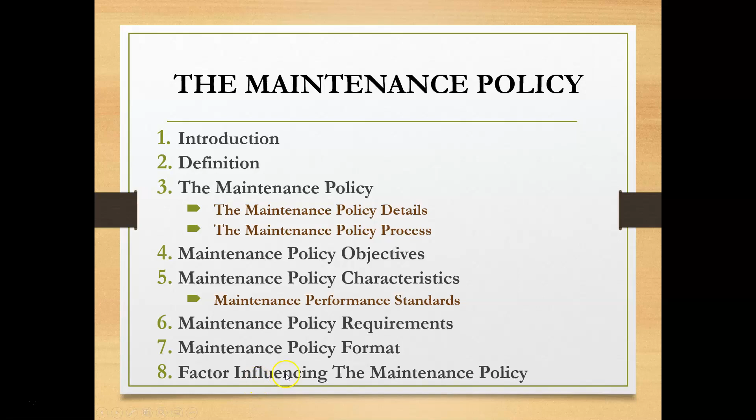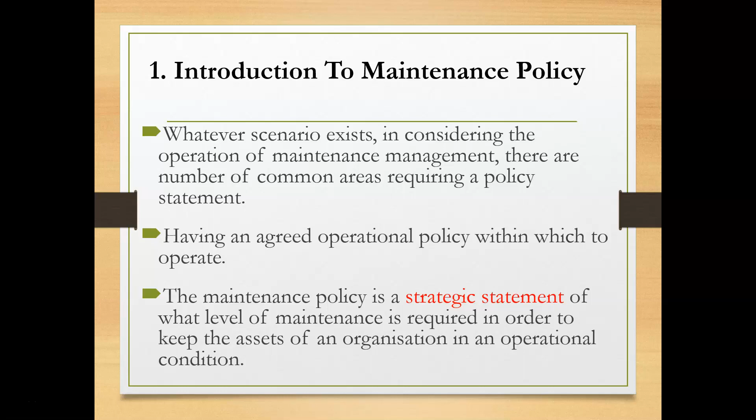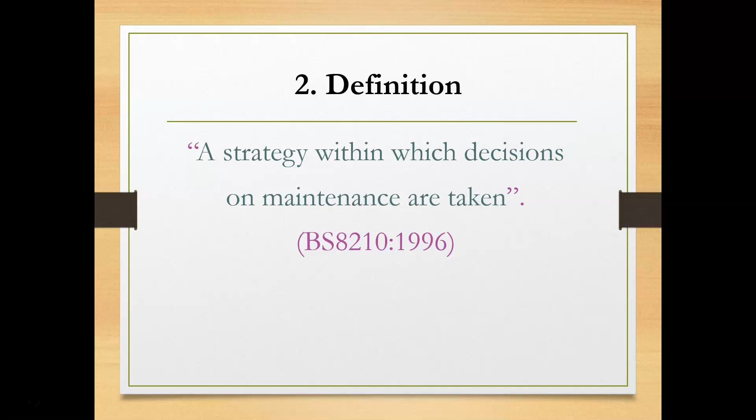Okay, so basically, maintenance policy is a strategic statement of an organization to show their requirement and their objective towards the maintenance policy and procedure, especially in operation condition. So this is the definition of maintenance policy: a strategy within which decisions on maintenance are taken. So basically maintenance policy will be like a guideline for an organization to organize their building, their assets.

So maintenance policy will depend on the size of asset, the nature of the organization's business, and the environment where the organization works in. So nature is basically what types of organization business, for example, if it involves public or a private organization. For example, public like a hospital, an organization or institutions, and also public parks. So it depends on the types of organization business.

And also the environment where the organization works in. For example, if the business involves high or sensitive information, for example in government offices, you have a lot of high security information. And if it is in a hospital, you have to think about the hygiene and safety for the area, and also for the people as well. So it depends on the environments the organization is dealing with.

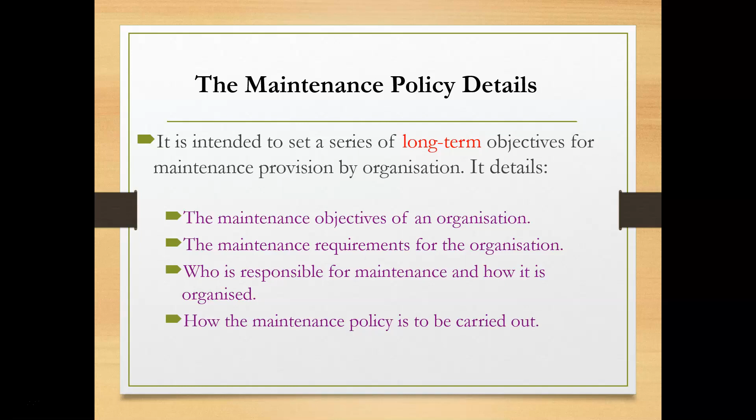Okay, so basically maintenance policy is for the long term, and portrays the organization's objective and requirement, and also who is the person in charge, responsible for the maintenance, how it goes, and what are the procedures and processes. So the process is to produce the strategic maintenance. So it is more on the strategic maintenance or planned maintenance.

And also you have to draw some policy for unplanned maintenance, for example, the limitations of what your organization could achieve. This is why you need to have a policy, so the user or customer will know your capability in managing any unplanned situations. It is very important for an organization to have a policy, because it may involve the time scale, the budget, and resources. So that's why you have to clearly state your capability in the policy content.

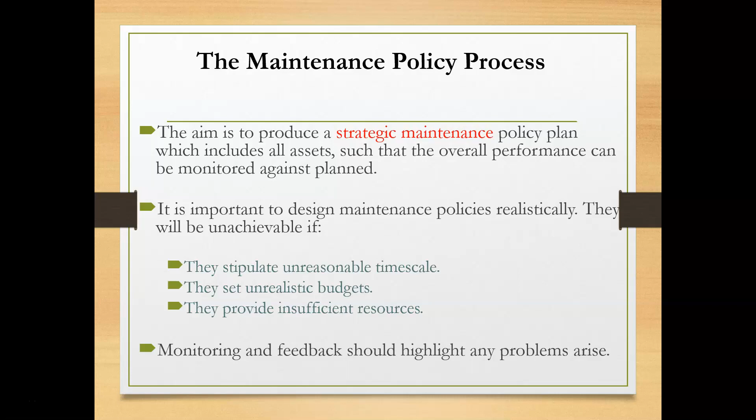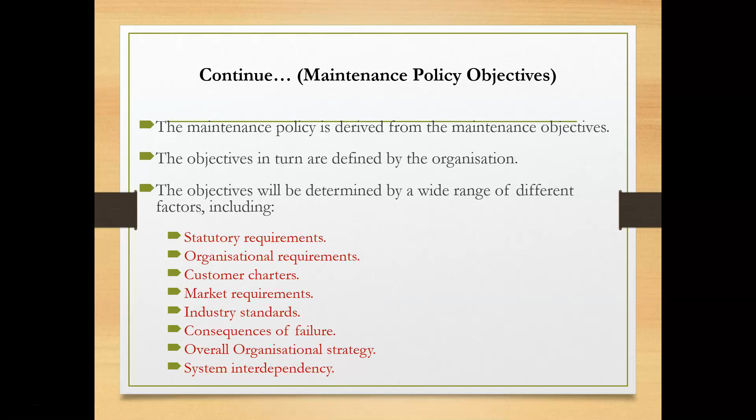And this is the objective of maintenance policy. So it contributes to the overall organization's objective, and what are the penalties for not carrying out the maintenance program, and what resources are needed to run the maintenance work. The objective is determined by the following factors: statutory requirement, organization requirement, customer charters, market requirement, industry standard, consequences of failure. So overall, this may not be the same for each building. It depends again on the nature of the business of the organization itself.

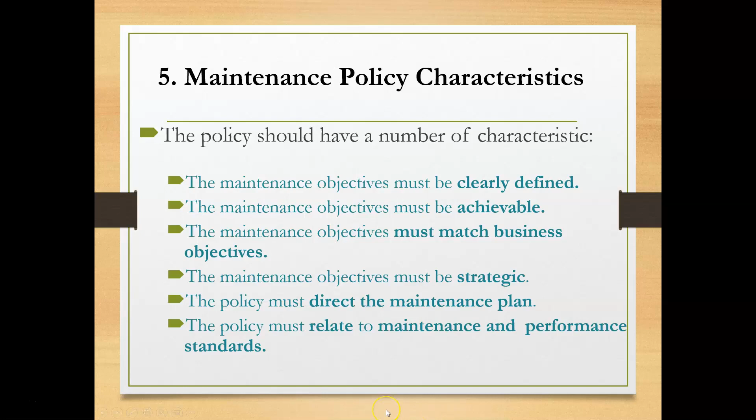Okay, so characteristics. This is very important. Any building should have the same characteristics, which must be clearly defined, achievable, and match with the business objective, meaning it is parallel with the company aims and objectives. And the maintenance objective must be strategic, directed to the maintenance plan, and relate to maintenance and performance standards if required. So overall, the maintenance policy must be strategic.

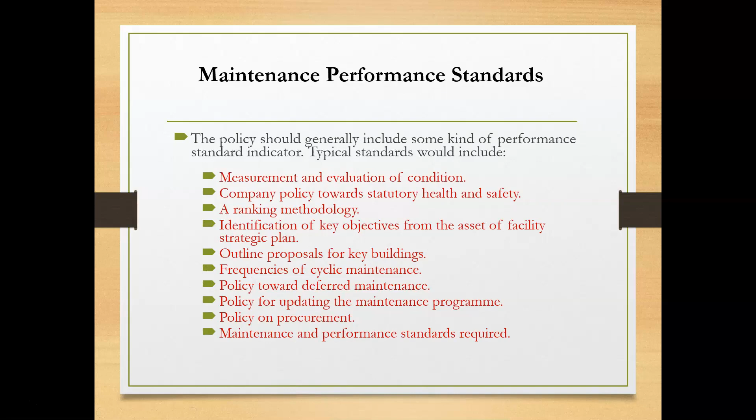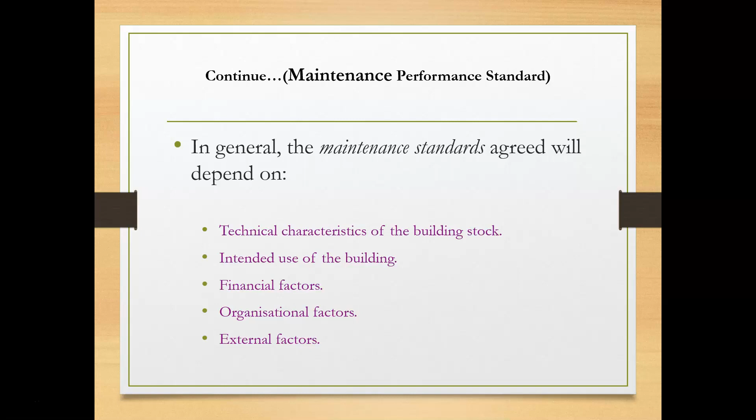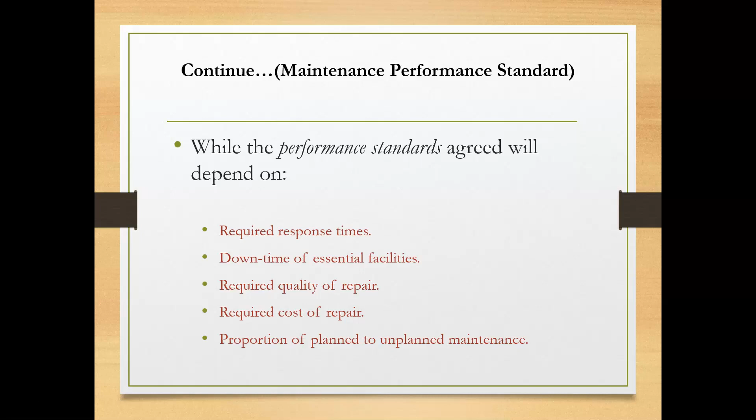Okay, so these are the maintenance performance standards. It depends on what types of building are involved. So the maintenance standard depends on the technical characteristics of the building stock, the intended use for the building, the financial, so that's why you need a maintenance policy to show your financial capability, the organization, who are the persons in charge within the organization, and external factors, especially when you have a third party in charge, for example, of your mechanical and electrical systems. The performance standard depends on your capability and your resources. So these are the guidelines that you should have in your policy as well.

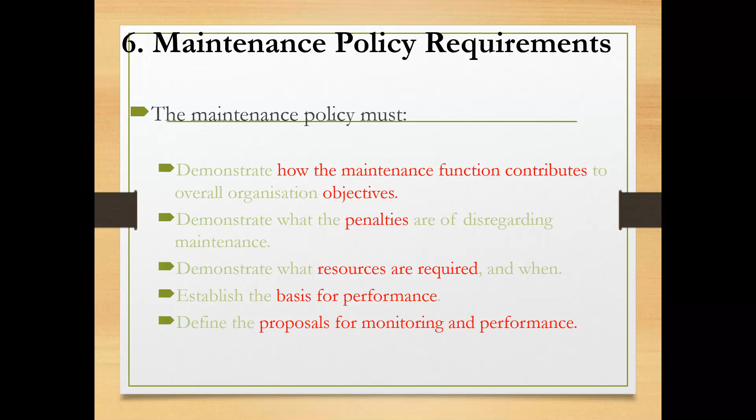Okay, so these are the maintenance policy requirements: to show the maintenance functions, contributions, any penalties, demonstrate the resources for the required works, and establish the basis for performance. So basic performance is the procedure, the workflow for any situation, and a proposal for monitoring and performance. So these are the maintenance policy requirements.

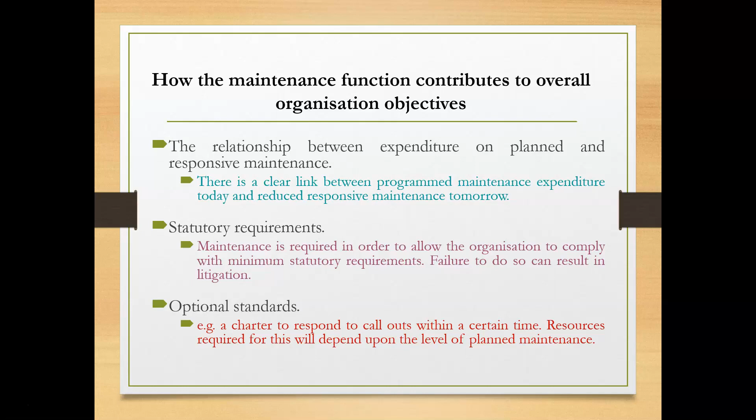Okay, basically maintenance policy is more of a guideline, to guide the maintenance operator or the facilities manager, to guide the user or the customer of that building to know where to go, and give guidelines on how to manage or handle the maintenance issues. So these are more on the guidelines.

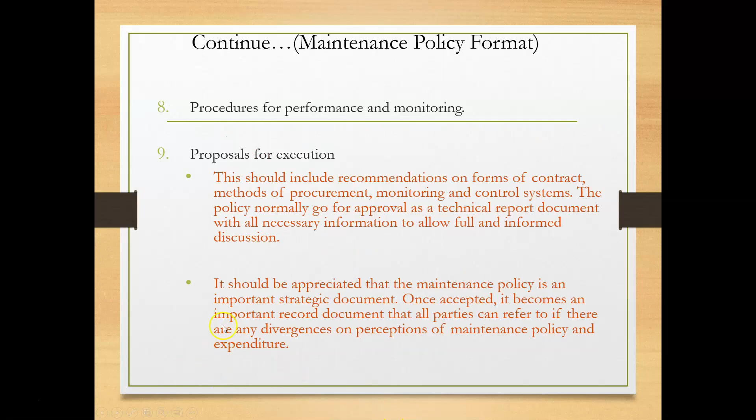Okay, for that I stop at the maintenance policy. We're going to continue with the factors influencing the maintenance policy.